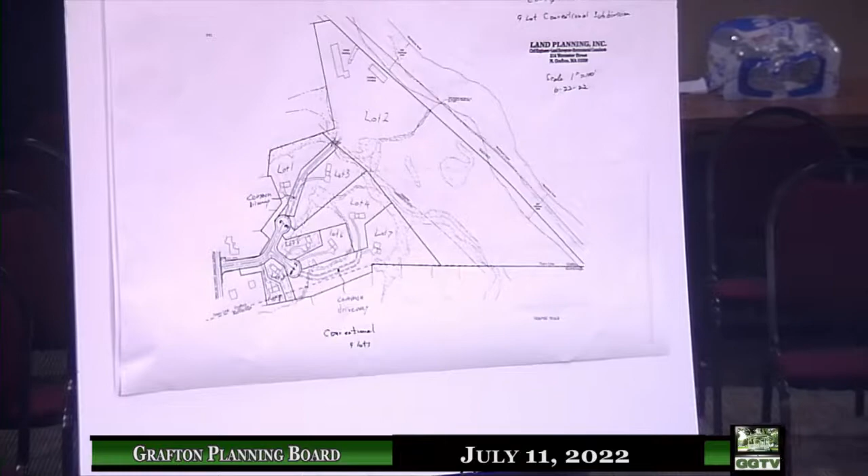I'm going to talk a little bit first. If you recall, we were here before, several weeks back, and introduced an 11-lot subdivision, and there was some commentary from the board about possible revisions to make it more palatable. The first was conventional plans within the confines of the 500-foot road limitation, and the second was an affordability component brought up by Mr. Hassinger. We listened carefully, and I directed Norm to do the conventional plans to show the board what that would look like. I'll defer to Norm now and come back to discuss the project further.

Good evening, Norman Hill, Grafton, Mass. I'm a licensed civil engineer and land surveyor. I'm going to pause you for one second, Chris - can you put this on presentation as well, since we have the digital copy for you on the call? Absolutely.

So we've two new sketches for you tonight. Both of them have a road length of 500 feet. This is the conventional sketch. Neither road is over 500 feet. It shows 9 new lots.

There would be 2 common driveways. One common driveway would feed lots 1, 2, and 3. The other common driveway would feed lots 4 and 7. The reason for those common driveways is to minimize any impact to the wetlands on the site.

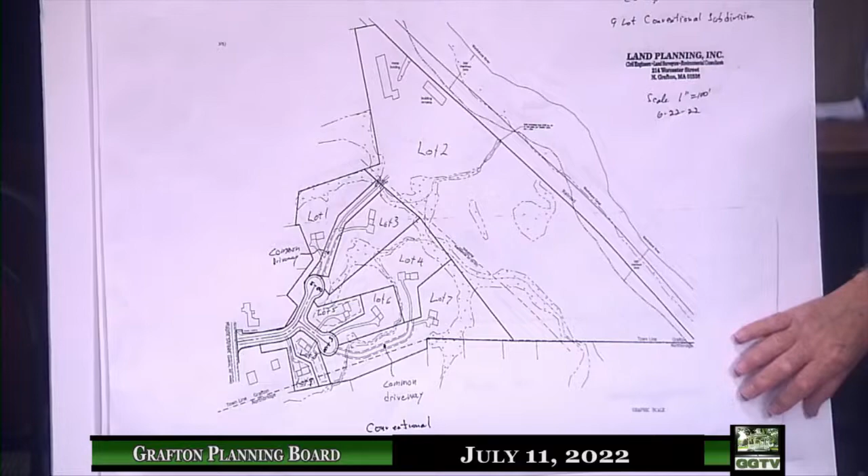Then we did a 500-foot dead-end road concept sketch for flex. These lots are much smaller, all clustered right up here. Again, the road is just 500 feet, and you would get 9 flex lots. There would be 1 common driveway to feed lots 1, 2, and 3.

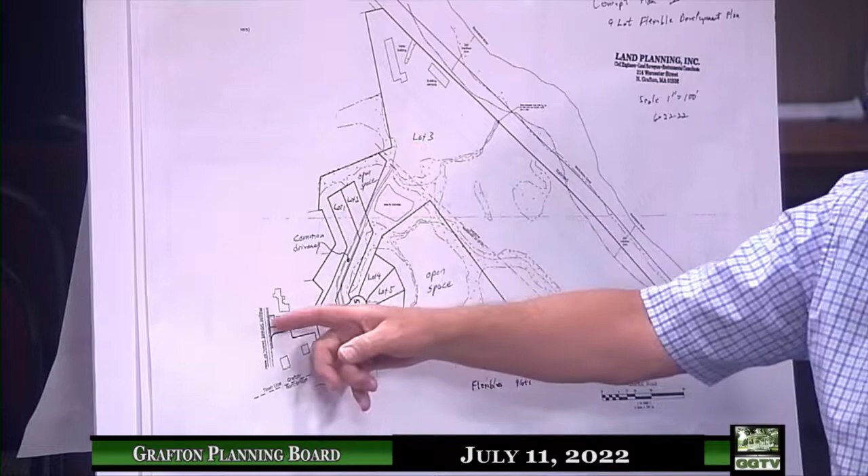I'd like to point out that there's an existing driveway that comes down right where that common driveway is proposed on both plans, so you can drive down here now to this field. There was an active facility down here for years, and that driveway is still accessible. So we positioned that common driveway to be right where that is to minimize construction costs.

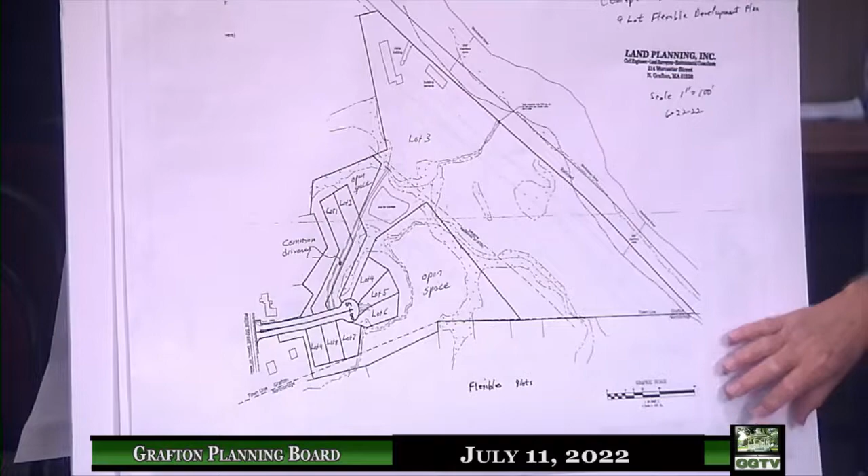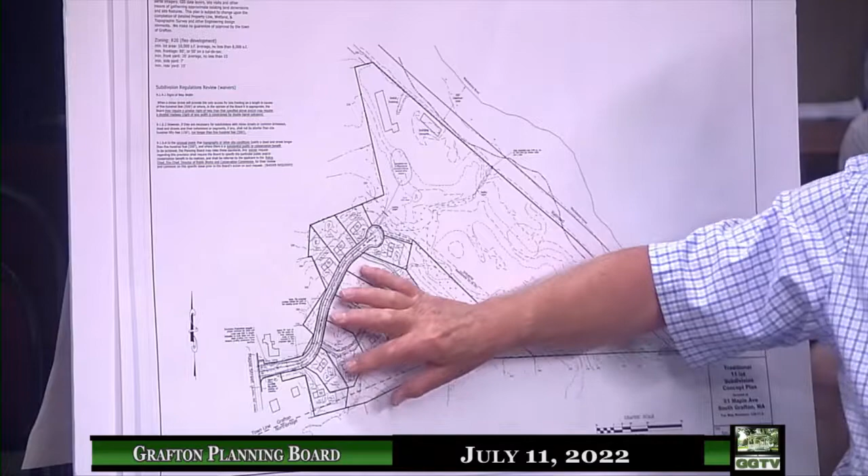So in either case, flex or conventional, we're proposing 9 new lots. Now the plan we had looked at last time was this plan, which had 11 lots and a 1,000-foot dead-end road. We were offering almost 6 acres of land for dedicated open space in consideration for a waiver to the 500-foot dead-end length. Now my client is willing to make one of these 10 lots an affordable housing lot.

So those are the 3 options in front of us. We're hoping that we could get some feedback from the board and maybe some direction as to which way I should proceed in my design work.

Before that discussion, I want to point out that the layout I prefer—the lots are more compliant and the project is more compliant than the other revisions. The only waiver we need is the length of road, which we know, and I believe we need a special permit for a driveway that cuts into those other three lots. The lots are in conformance with the square footage, and the road then continues on and accesses the larger lot, which is where the farm is.

So the conventional plans have really funky layouts to them, but they are compliant as well. So we explored that. I told Norm to introduce the fact that we're willing to have one of the homes be affordable, which seems to be trending that way in developing larger parcels. We're back here tonight asking the board to take into consideration what we've done, and we'd like to come back with something definitive, lay it out in detail, and amend our initial filing. So we're going to listen some more and try to get back here and move the project forward.

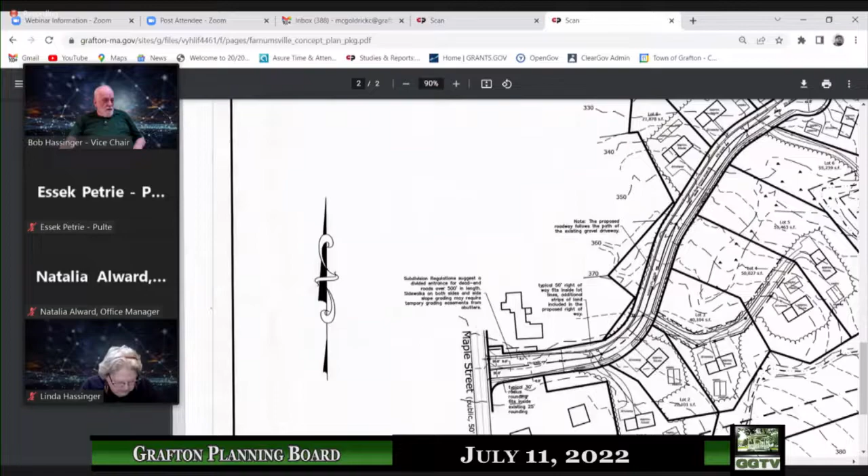No, that's it, I think. Yeah, he's referring to the old plan. So just under 1,000 feet, Bob. Right, and that's the one that you prefer. Yes, sir. I'll just tell you, I won't vote for it. I can't go for the 1,000-foot driveway.

And how many lots does that one have? 11 total. They're all conventional lots with adequate frontage and acreage, and they have a nice shape to each lot. And there's no alteration of any wetlands, and 1 unit would be affordable.

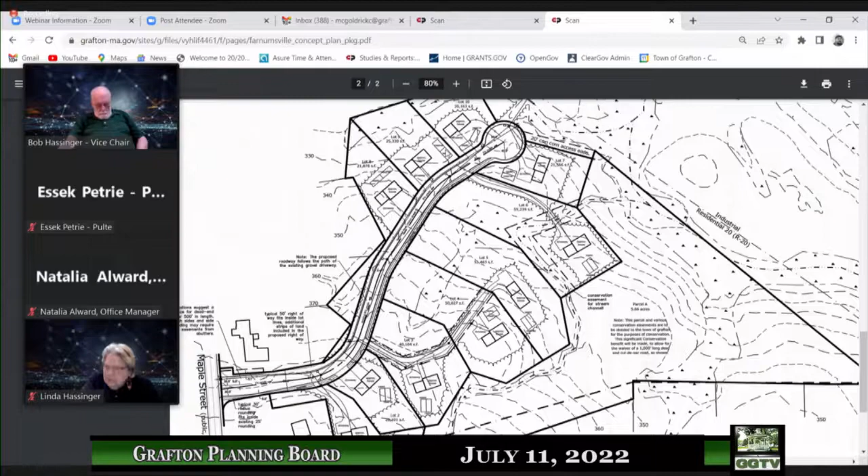I said it, I can't go with a 1,000-foot driveway or roadway. I mean, I think the board has the power to waive the 500 foot. You've done it in the past.

We're proffering, protecting, giving almost 6 acres of open space, keeping the back the way it is for now, and introducing an affordable component to the project. Those were what we thought provided the basis for the board to deviate, which it states in your bylaw. So, I mean, you certainly have the power to do it. But we thought we were proffering considerations based on the configuration of the site and a minimum development. Our prior project size was, I believe, 42 lots. No, and this is compliant with your bylaw and rules and regulations, but for the length of the roadway. So we thought as a package deal, what we were giving you would allow you to exercise that discretion and give us the relief we needed for this particular version of the development.

I think when we last looked at this, I was thinking that you might be able to look at a flexible plan that is kind of along these lines, but pulling back the road, not all the way to 500 feet, but to 600 or 700 feet, with a lot arrangement not too different from this, except as a flex plan, the lots can be smaller with less frontage. But with a layout that's not dramatically different than this, somewhere between 500 and 1,000 feet. That's sort of what I was expecting. You might be able to find a way to do that.

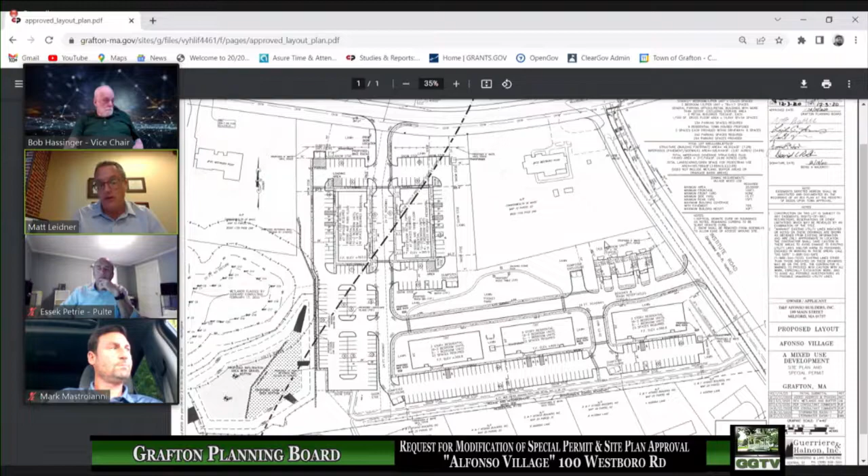In addition to those 5 buildings, there are 4 townhomes over by Institute Road. The approved plan had a total of 105 units: 101 in the 5 larger buildings and 4 townhomes, plus approximately 14,000 square feet of commercial space combined on the first floors of the 2 buildings by Westboro Road. That's an overview of what is currently approved.

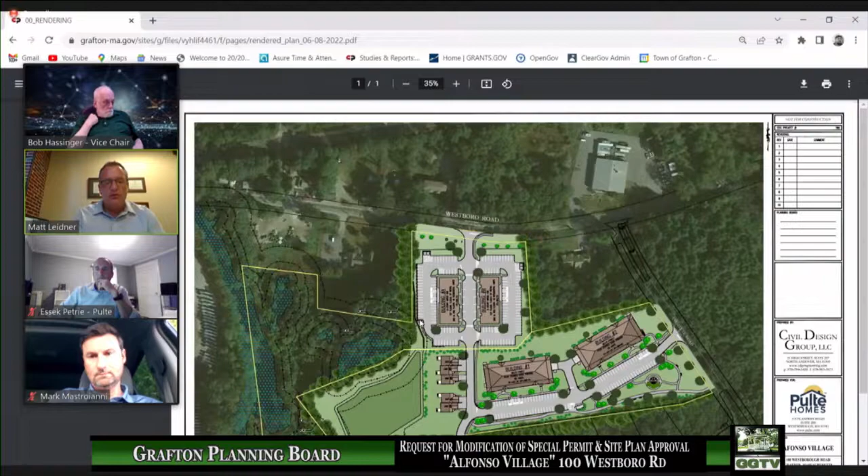So if we may go to the rendered version of the proposed modified site plan, we'll work from Westboro Road down.

The 2 buildings closest to Westboro Road, buildings A and B, remain the same—still just over 14,000 square feet of commercial on the first floors combined, with 32 residential units, 16 each, on floors 2 and 3. Those buildings don't change, and circulation stays the same, though we shifted remote parking closer to those buildings, adding some parking around them.

For the buildings to the south, we're proposing to consolidate what was 3 3-story buildings, each with 23 units, into 2 50-unit buildings. Whereas the approved buildings were 3 stories, these are each 4 stories with parking beneath the footprint in the basement level, allowed by zoning. The zoning changed during the process to allow 4 stories in this district.

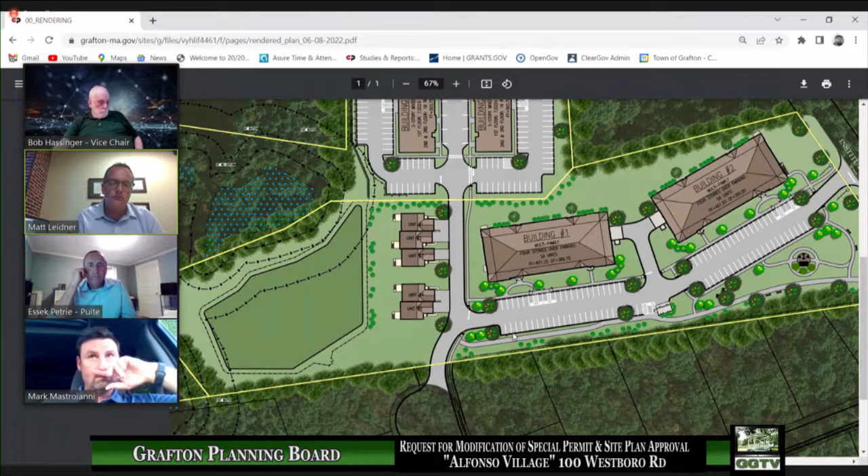Where is it? It's out in front of Building 1, sort of bottom left corner of that parking lot. It's not beyond the realm of possibility that there may come a time when EV charging stations may show up in the garages underneath those buildings.

We're going to be seeing a lot of action on that over the next decade. A bit of a chicken and egg problem with electric vehicles, but I think the momentum is building.

I'll just briefly add to what Mr. Robbins said. I agree with much of his benefit points, but one additional benefit I see is the connection to that other development just to the south of this. I think that's a strong benefit for multiple reasons. The residents can avoid Institute Road if it makes sense for their travels, especially if they want to stop at the commercial buildings in front before they go on their way. It also provides for if a tree or something else falls on Institute Road, which has happened in the last year or two in two different spots, which would have essentially cut off travel on Institute for both of these developments. Having that extra avenue to leave the property would be overall beneficial for safety reasons. So I like adding it to the cul-de-sac there.

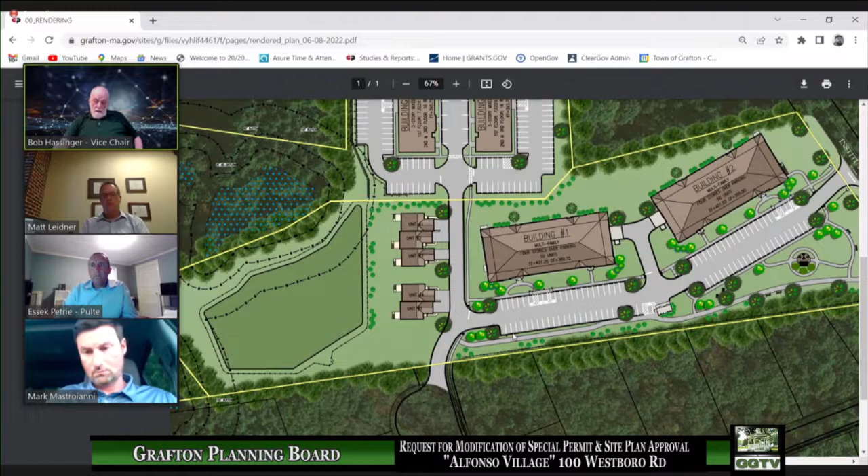That again raises questions I had about that middle aisle. I don't remember the dimensions of it, but that could get to be a fairly busy street, basically like a city street with parallel parking on both sides. I want to be sure we're confident about the dimensions, that they're quite adequate to function that way.

I just had one other thought, I'm not sure where this really goes, but if buildings 1 and 2, and the townhouses always were, if they're now under individual ownership, who maintains the park area and all that? There'll be owners - that would be the condo association. That's my only question.

I just have one. The revisions to the traffic study were discussed. I think I know the answer, but should that be peer reviewed as well? We can wait to see if the revisions are substantial enough in the board's opinion to require it. I think that's what we should do. I'll say, at least for me, if we had the original traffic study peer reviewed, which I believe we did, then it makes sense to have the revisions peer reviewed as well. That's my feeling. Ideally by the same person.

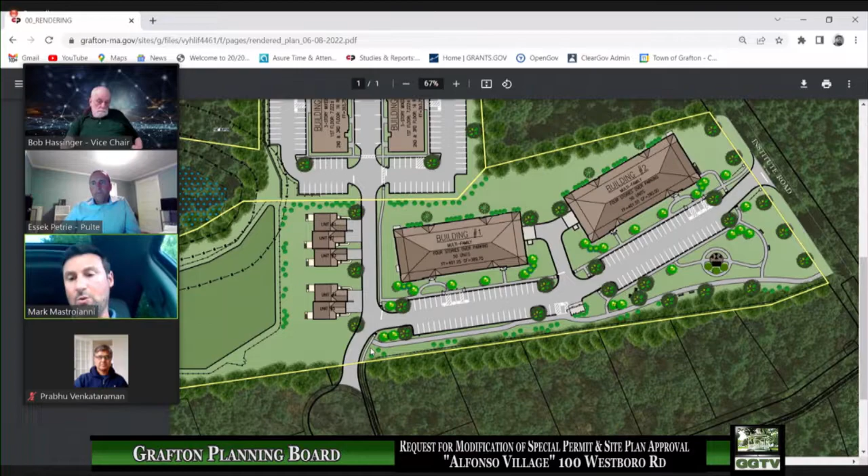Yeah, as mentioned, we have a lot of experience working with DHCD and getting the units approved for the SHI. One of their main requirements, exactly what you mentioned, was the proportionate number of bedrooms. So there will be an equal proportionate number of 1-bedroom affordables and market rate, and same with 2-bedroom affordables and market rate. All of that will be shared with the town and coordinated with you, and the package needs to be approved and then goes to DHCD for approval. Yeah, I know they also have requirements for the floor area of the various size of units.

I don't think we need to worry about this. I know you're well aware of those, and I don't see an issue there. But they've got all sorts of requirements, a lot of I's to dot and T's to cross.

All right, since I don't see anything further from the board or staff, if any member of the public wishes to speak on this, as it is a public hearing, you can raise your hand on the Zoom raise hand feature and we'll bring you into the meeting. Give a few moments for that. I'm not seeing anyone, nobody in the room raising their hand either.

So our next steps, we're waiting on the traffic study update and the peer review, and to see if there's any changes from the conservation review as well. I think the next step would be for the applicant to request a continuance, and the question would be how much time do we need. Do you have any insight, Chris? For the traffic peer review, it depends on when the revisions are received. I haven't reached out to get a timeline, but a revision of this size could be a fairly quick turnaround. That's what I was thinking too. If you're going to have peer review of a study you don't have yet, that's not all going to come around in time for our next meeting.